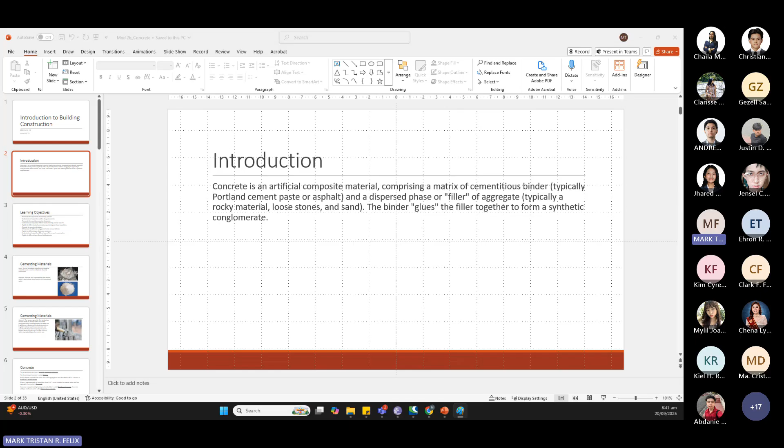Okay, then the other one is fine. Then whenever we say the term aggregate...

It is the material added to concrete that is normally quarried. So sand, you excavate that from the nearest source, which is normally a river, like here in the Philippines.

Here in the Philippines, like here in Luzon, not sure where the other island provinces get their fine aggregate.

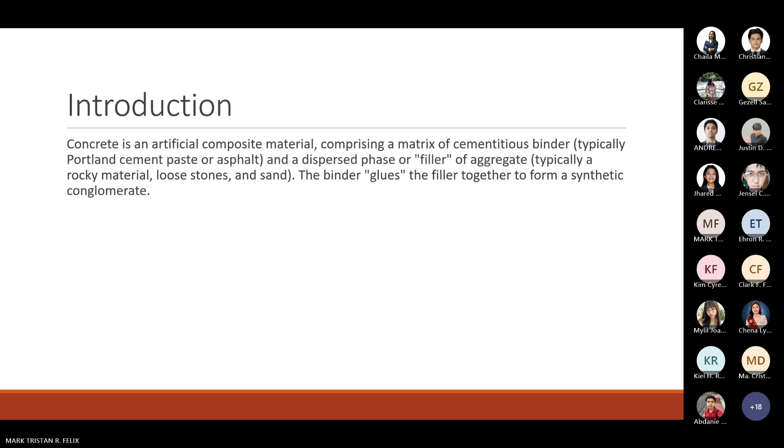Okay, so at the end of this lesson, these are our learning objectives. First, we enumerate the components of cementing material, understand and explain the qualities of a good concrete, followed by the composition

of concrete, and then understand the testing used for concrete, the ratio for concrete proportioning, concrete mix design, and curing period for the removal of forms,

different types of concrete admixture, different types of forms used in construction, and lastly, metal reinforcement.

So you might wonder why there's metal reinforcement. It's because when we just make concrete alone, that's only the composition of the four materials I mentioned.

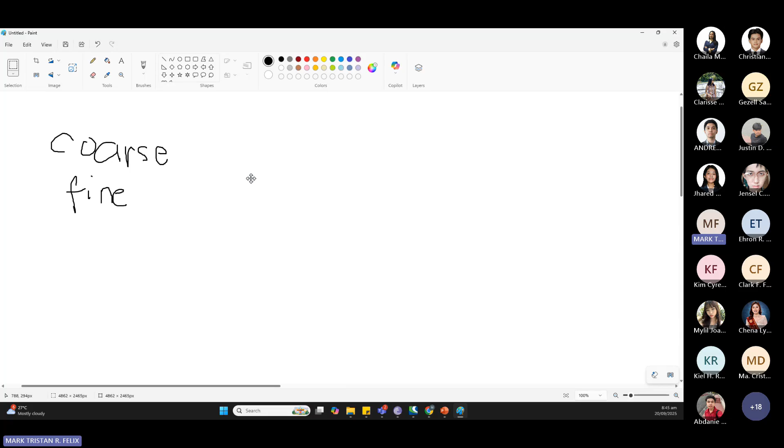Although this topic will be discussed further. For example, let's say we have a beam. Okay, a beam, wait...

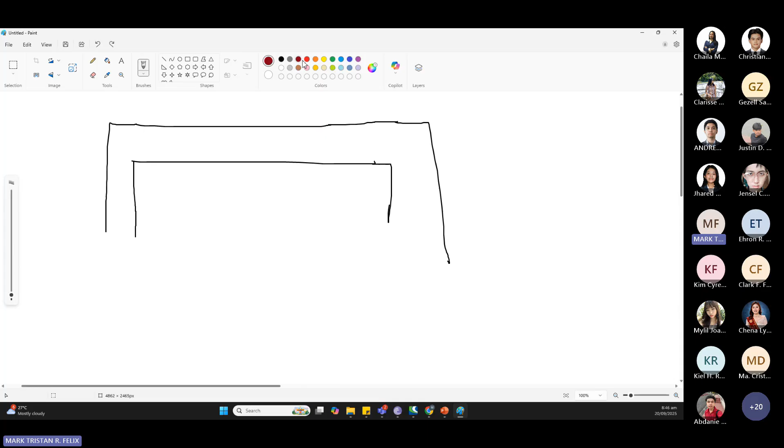So for example, we have a beam, let's say supported by both ends. Now, our deflection, right? Normally when we apply a load on top, it goes like this.

Okay, so now imagine the molecular composition of concrete, or its surfaces and what's inside.

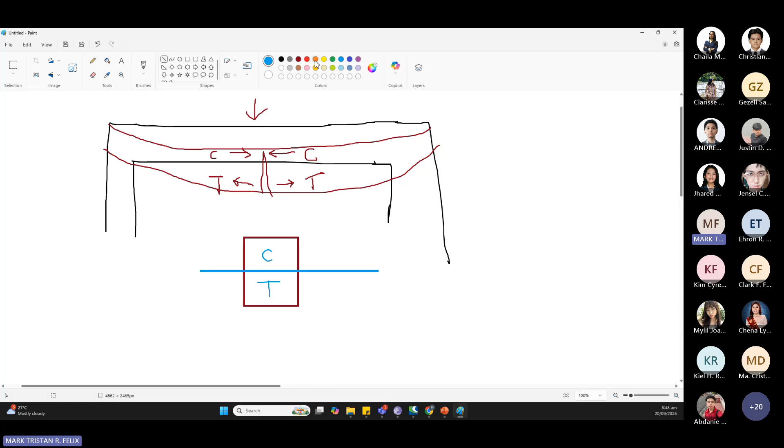So kapag wala tayong bakal, ang mangyayari sa concrete, itayo natin upright. Once na nag-apply ka ng load, pag walang bakal, mabibitak yan. Ang failure niya kung nasaan yung load. So we don't want that to happen. Kaya para mitigate ang failure kapag concrete, naglalagay tayo ng rebar sa loob.

Now with that rebar, so i-draw natin dito. So with that rebar, actually ang dinedesign usually sa ilalim, kung nasaan yung tension. Eto pa yung sa taas, naglalagay lang tayo para yung sa very basic para pantay sila, tsaka may paglalagay ng stirrups. Pero may meron pa ring calculations that would require. Pero in simple cases na tension lang ang kailangan mo, yung sa ilalim lang ang meron, tapos ito yung sa ibabaw, yung paglalagyan lang ng stirrups.

Pero anyway, through this tension, ang rebar na ina-apply natin, i-withstand niya yung tension. On the other hand naman, since it is a concrete material, yung compression, walang problema. So both of the materials work together to counter the forces of compression and tension. So ganito yung bending ng beam kapag ka-supported sa both ends, and then ito yung location ng compression and tension.

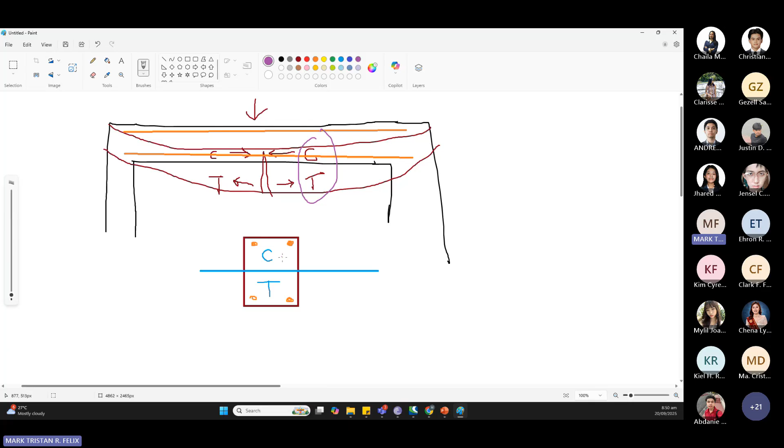On the other hand naman, if the beam is sabihin natin cantilever, medyo ibang usapan yan kasi once na nag-apply ka ng load dito, sabihin natin the support is nandito sa side na ito. When you apply a load, okay? Ang ano niyan, pababa, 'di ba? Parang yung sa springboard ng mga swimming pool sa Olympics, ganyan, 'di ba?

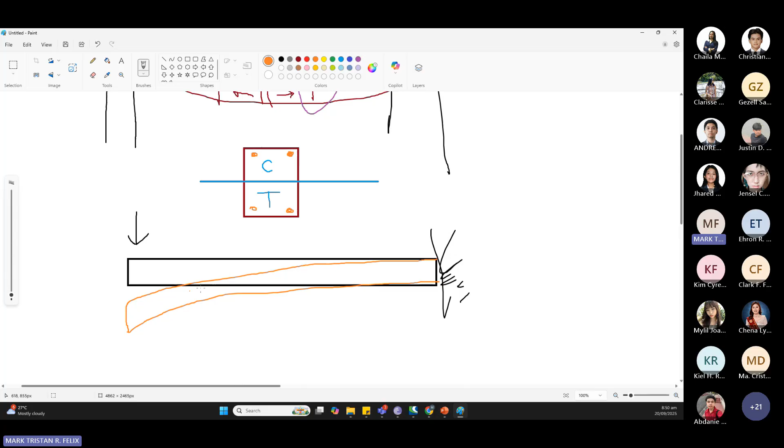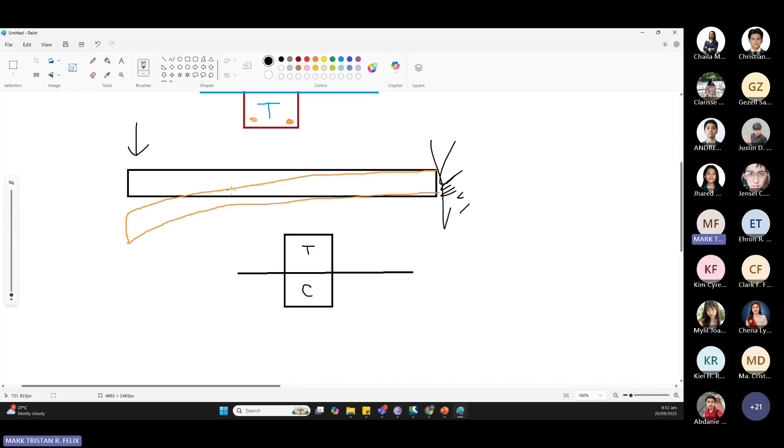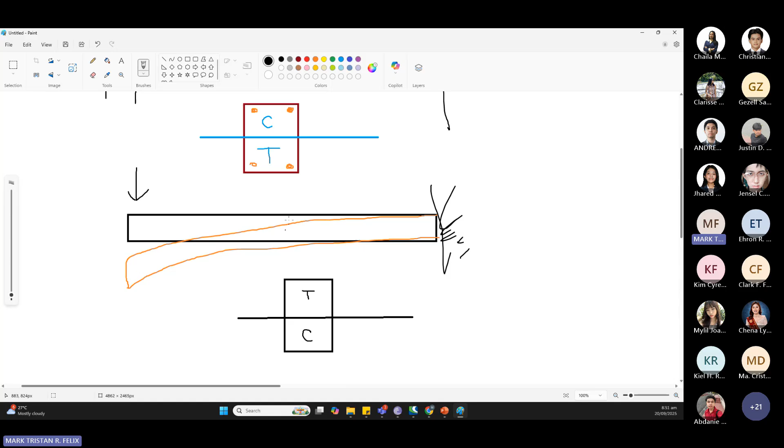So since ang deflection niya ay ganyan, o yung pagka nag-bend siya, ang case natin is ang curvature niya parang pataas, 'di ba? So sa mga cantilever beams, ang location ng tension at compression ay magkabaliktad naman. Nandito yung tension, then nandito yung compression. Kasi yung ibabaw naman yung medyo na-stretch, 'di ba? Compared doon sa ilalim. So ganito yung magiging behavior, and then ito yung location ng compression and tension, which will also be discussed sa inyo further kapag nandun na kayo sa subject na RCD.

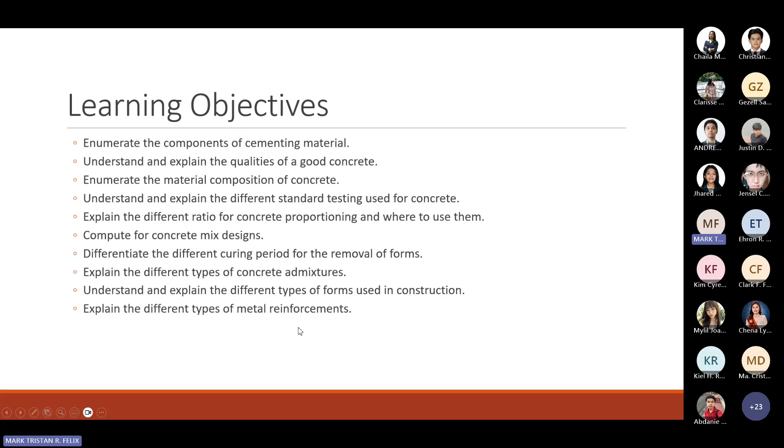Mas detailed yung discussion dito. Okay, so let's continue. Kaya ko siya in-explain muna for you to understand the purpose of having metal reinforcement or steel reinforcement sa concrete, at saka kaya siya tinatawag na concrete lang versus ang reinforced concrete. Pero i-discuss ko siya later on in more detail.

Ayan, so cementing materials. Ito yung mga cementing materials that can be used, yung binding o yung parang glue material o yung nagbabind. So first is lime. It is one of the oldest manufactured building materials, used in mortar and plastering by early civilization. Kahit panahon pa siguro ng mga Egyptians, ng mga Romans, etc., ito din ginagamit nila. Then next is gypsum.

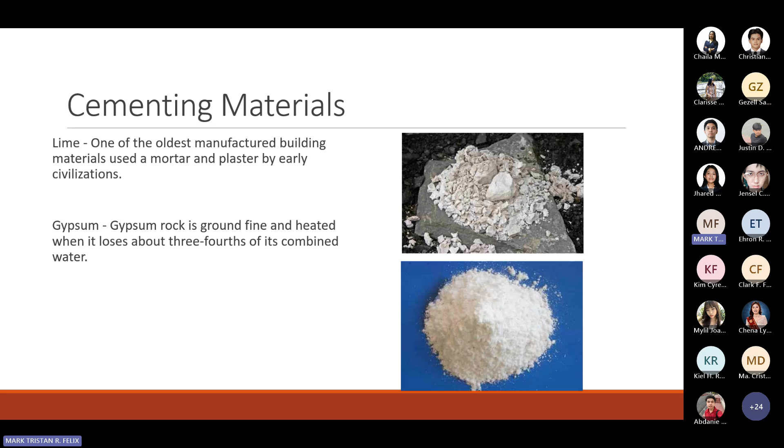Gypsum is a rock, ground fine, heated when it loses about 3/4 of its combined water. So same din, it is a cementing material. Ayan, so nung panahon pala ng mga Roman, doon nila na-invento yung cement. So from these two, they evolved with this one. The Romans were the first to develop cement by mixing slaked lime with pozzolana, which hardened under the water. Meaning pag pinag-combine sila, tumitigas siya kapag may tubig.

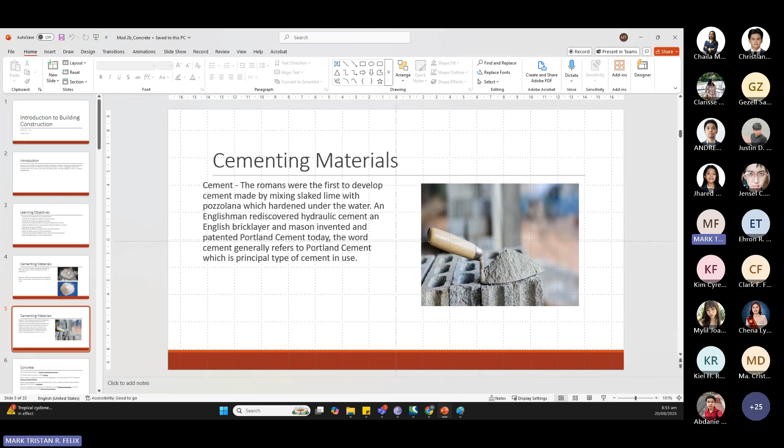An Englishman rediscovered hydraulic cement, an English bricklayer and mason invented and patented Portland cement today. So sila yung nag-patent ng Portland cement. Then the word cement generally refers to Portland cement, which is the principal type of cement. So class, take note na maraming types of cement, pero ang pinakasikat o pinakakilala o pinaka-commonly ginagamit is Portland cement. So actually madaming klaseng cement. Let's do our quick research sa Google, tingnan natin.

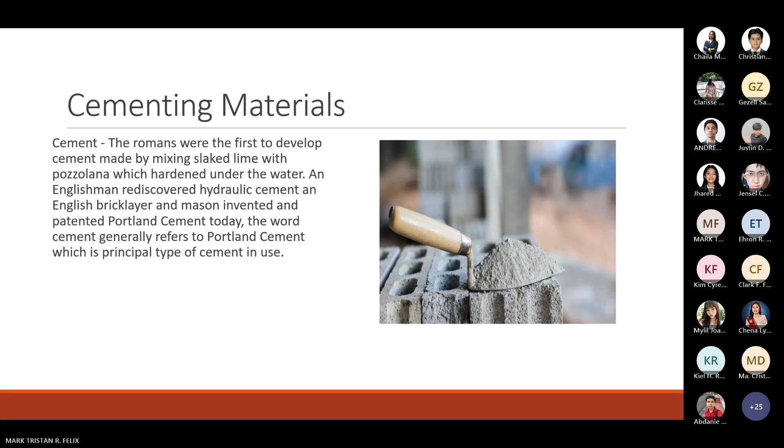So next, concrete. As I've said a while ago, it is a combination of cement, aggregate, and water. For the aggregate, that's the combination of coarse and fine aggregate, or sand and gravel. So ang tawag natin kapag tumitigas yung concrete is setting. You may find it confusing kapag sinabi natin setting ng concrete tsaka yung curing. Pag curing kasi, we make sure that the desired strength as it sets is achieved, kung paano natin pinapatigas yung concrete. So again, almost identical, similar yung setting and curing, pero iba yung definition ng curing versus setting.

When cement is mixed with water and fine aggregate, or less than 1/4 inch, so it is known as mortar or cement plaster. If we are only mixing sand, walang gravel, ang tawag natin doon is mortar or cement plaster. Normally the application of that sa construction is kapag papalitada tayo, yung plastering ng pader, naglatag tayo ng hollow blocks as plaster. So kung gusto natin kinisin, buhangin lang yon, walang graba, kasi kapag may graba, kakapal yung palitada natin, tsaka baka hindi siya kuminis.

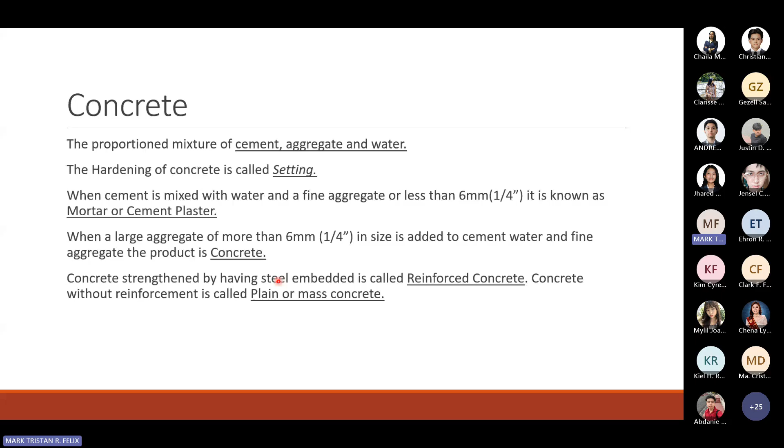So what's a good quality of concrete? Concrete should be strong, durable, of uniform quality, and thoroughly sound. So dapat matibay, matigas. Wait lang.

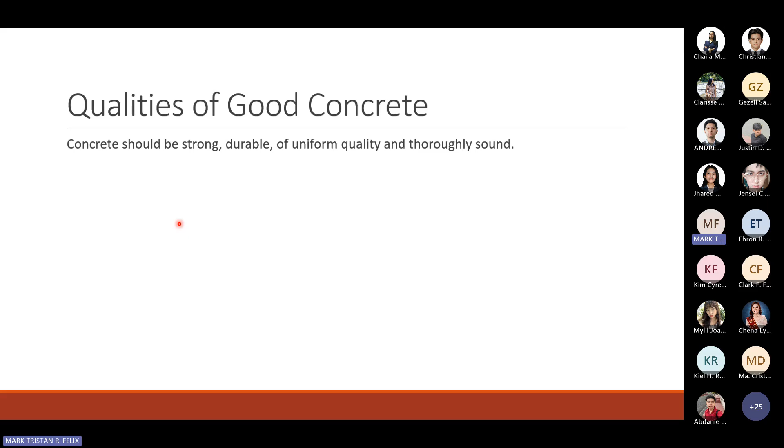Okay, so the good qualities obtained. Paano ba natin nakukuha itong good qualities of concrete? Paano natin na-ensure na matibay at sound at uniform yung quality? Meaning, all throughout the entire concrete member or structure, iisa lang yung quality. So we should be careful first in the selection of materials. Syempre, kung anong ginamit natin sa isang part, yun din yung gagamitin natin all throughout the entire project. Then, correct proportioning. Hindi pwedeng basta-basta halo lang tayo ng graba, ng sand, tsaka ng semento.

Sorry class for the intermission. Anyway, going back. So, aside from the correct proportioning na hindi tayo basta-basta buhos lang, lagay lang ng mga materials, we should also make sure that whenever we mix the material, we mix that thoroughly. So, there are at least 3 ways for us to mix concrete.

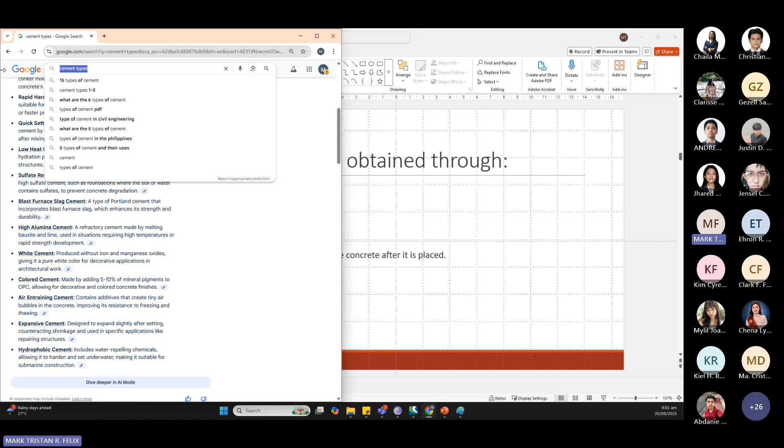Una, using a concrete mixer coming from a batching plant. Ano bang itsura ng batching plant, meron ba ako dito? Wala. So, pakita natin ang itsura ng batching plant. It can be done sa batching plant, or it can be mixed by a one bag mixer, or it can be done manually. Yung sa manually, yun ang kailangang i-thorough mix natin. Pakita natin, batching plant, para may idea kayo kung ano itsura.

Or class, kinakausap ako ng anak ko. Anyway, so going back.

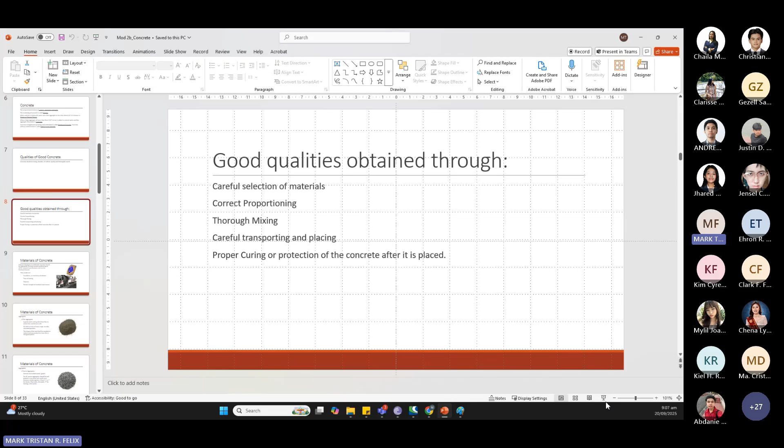Whenever you are using this naman, ang ginagawa dito pagkahalo, ibinubuhos na doon unti-unti, pwede mo siyang ibuhos doon sa mga timba para i-lift manually. That's also same with the manual mixing, yung hahaluin sa sahig. So as part of the transporting, tina-transfer and piniplace siya sa location of the structural member na concrete through pail.

Gumagamit tayo ng timba. Normally, meron tayong nakikita mga timbang malalaki sa site, hindi yun pinupuno kasi mabigat ang concrete. Kahit maliit na timba, pag napuno, sobrang bigat na, kaya wag pupunuin yung malaking timba tapos ipapabuhat sa labor natin. Alam naman yun ng labor natin kung hanggang saan ang carrying capacity nila, pwede naman silang magpabalik-balik ng pagbuhat ng timba na may concrete.

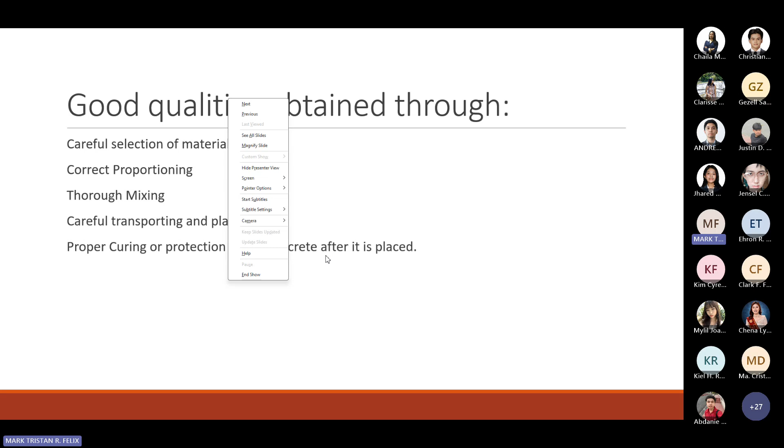Lastly, proper curing or protection of concrete after is placed. Yung curing, eto na yung time habang nagsiset siya, we achieve the compressive strength na kailangan niyang ma-achieve. In terms of protection, kapag let's say inabutan ka ng ulan, takpan para hindi ma-penetrate ng ulan yung tubig, etc.

Kunwari nag-hardens na, later I will discuss kailan pwede tanggalin yung forma, binubusan ng tubig. That's part of the curing process. Kasi pag hindi, dahil may external weather factors, the amount of water applied sa concrete, pwede siyang matuyo. Wala namang problema kahit madalas basain yung structural member, actually mas nagpapatibay pa nga sa concrete yun. Wag lang magdadagdag ng tubig habang basa pa yung concrete, ginagawa to kapag tuyo na.

Then that's also the reason why whenever we created a concrete cylinder, inilulubog natin sa tubig kapag natanggal na sa forma, kasi it helps the concrete as it settles or as it hardens. So yung curing niya, para ma-reach niya yung desired strength niya. We submerge that sa curing tank o sa tubig, and in a way, yung actual na binuhusan natin para ma-cure, bubuhusan pa natin siya ng tubig.

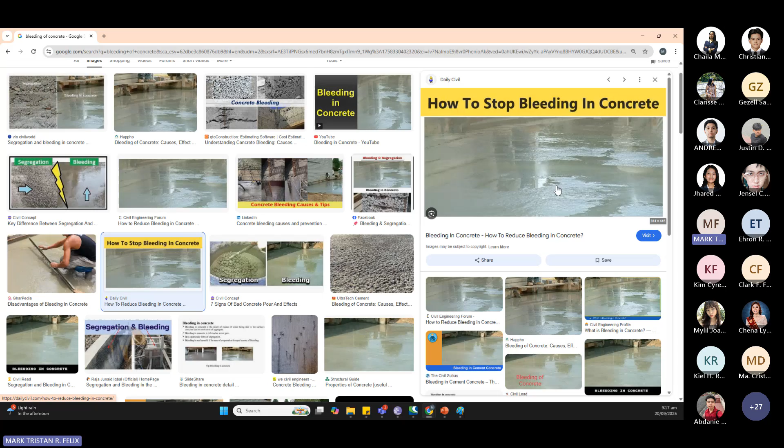Next is water cement ratio. The amount of water used per bag of cement usually varies from 5 to 7 gallons, with 6.5 gallons average for ordinary job condition.

Ideal mix is one that is plastic and workable. It should be workable, plastic in a way, matigas. Then, when using pumps, it should be fluid enough for us to transport through concrete pumps. It should not be too dry, because it would be hard for us to work on it. That's the term we use, workable. So if the workability is poor, it's hard to use.

And then, not too wet, because the ingredients would separate.

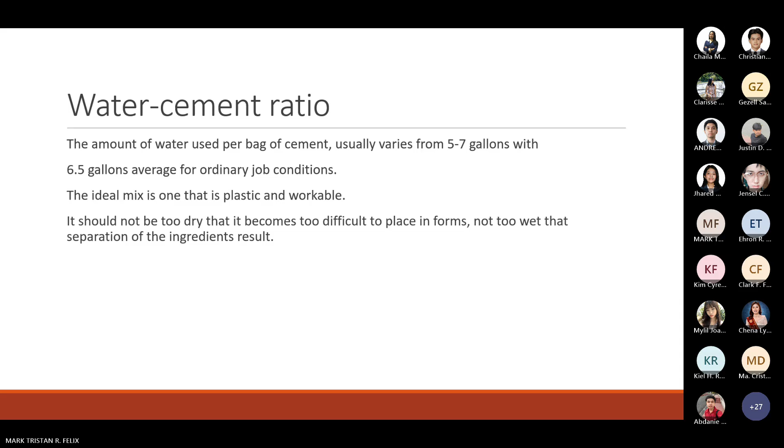And for us to determine if we have workable concrete, this is the test we do. You will do this in the subject I mentioned, construction materials, not sure what it's called now, but that's the subject where you'll make a cylinder. Before you create a cylinder, this is one of the first tests to ensure that the concrete you will form later on will be workable.

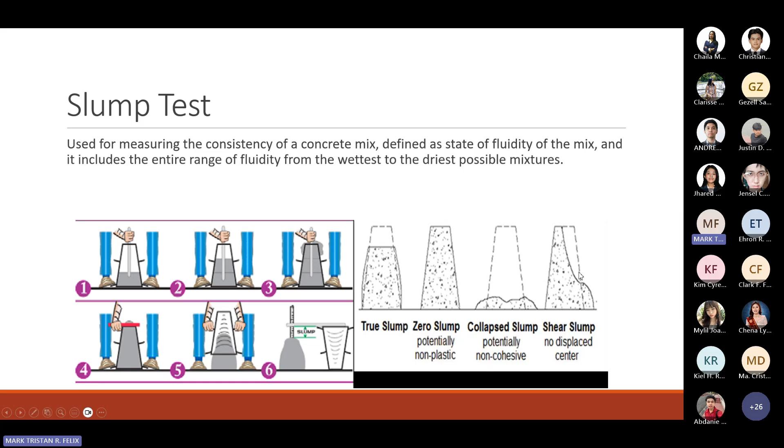For the proportioning of concrete, we have what we call classes. Later on in our class I will prepare an ACI method, because that should be discussed with you. Aside from this, the proportioning of concrete is about how we proportion concrete based on the strength we design. Now this one, I'm not sure if it's under the syllabus, but I'll include it since it's still proportioning of concrete - it's not just based on ratio.

What I'm showing you here is based on the ratio. What I'll discuss later is computed. So for the proportioning of concrete, we have classes and this is the ratio. The first number stands for the number of cement, the second is the number of sand, then the number of gravel. So how do we do it?

For the ratio, 1 bag of cement, and then the next one is the equivalent in bags of sand and gravel. But the proper way is to make a mold for calibration - you create a 1 by 1 by 1 cubic foot mold.

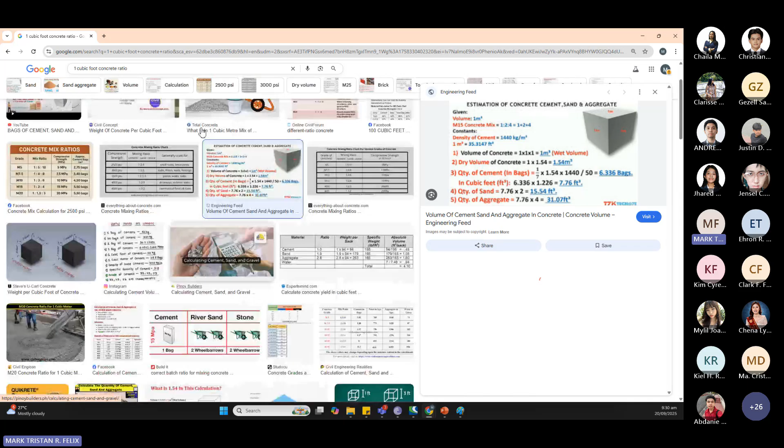entity, 'di ba? Galing yan sa puno. So nag-a-absorb kasi yan ng tubig. Yung mga kahoy. Now, kapag yung normal plywood ang gagamitin natin, tapos we apply oil, so somewhat nagkakaroon ng parang separation yung concrete ng konti doon sa plywood. Kaya lang mag-absorb pa din siya ng tubig.

Ngayon, para mas maayos yung natin, paggamit ng formworks, ito yung ginagamit, phenolic. Pero hindi naman restricted gumamit ng plywood. Kailangan lang talaga yun, maglagay lang ng oil at least para hindi mahirap tanggalin. So now, if you're gonna use phenolic, since may coating siya, kailangan mo pa ding maglagay kasi ng used oil.

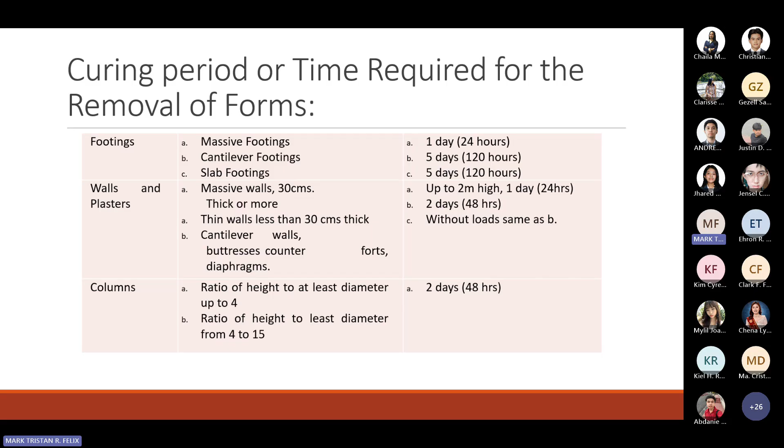Dito. Pero for those slab or beams, kapag tinanggal na yung formworks, tinutukuran natin sa ilalim. Yun yung makikita nyo sa construction site. Yung mga may bakal na nakatukod or sa mga bahay na pinapagawa, may mga kahoy or coco lumber na nakatukod sa ilalim. Ang tawag naman doon, shoring.

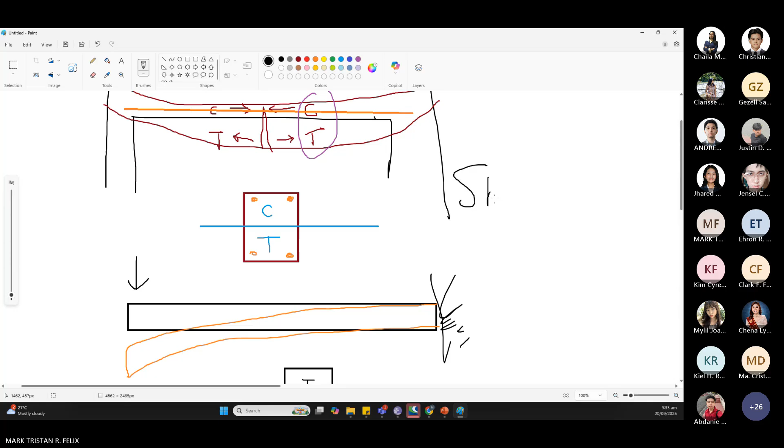So, ang tawag doon, shoring. So, kung ito yung slab natin, meron tayong mga tukod sa ilalim. Para habang tumitigas siya in 28 days, so may tukod tayo.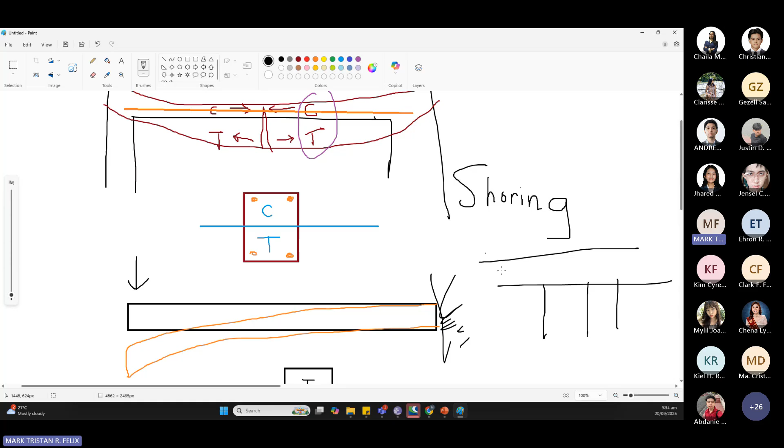Then class, pag tinanggal mo yung formworks, hindi ka pa pwedeng mag-continue ng work sa taas ha. I think a certain time frame pa, kahit hindi pa 28 days, dahil may shore naman. Pero wag ka muna mag-work dun kasi medyo malambot pa yung loob niyan. Kahit may shoring, baka kasi maglagay ng mabigat, hindi kayanin ng shoring. Masira lang yung ginawa. Ito, pakita din natin.

Ayan, may shoring na nilalagay sa walls. Ayan, eto, shoring. Ayan yung mga makikita niya nakatukod. Pwede rin naman gawa sa kahoy yan, pero normally, ang ginagawa na ngayon, bakal eh.

Tsaka para reusable. Eto, pwedeng, kunwari mangongontrata kayo balang araw, magandang maging investment tong mga shoring na to kasi pagka kinote mo siya sa isang project mo ngayon, sa mga susunod, pwede pa rin siyang i-code. So, hindi mo na siya itatapon kasi nare-reuse.

Now, kunwari, merong masirang part, yung mga clamp. Eto, yan yung pula, yung mga clamp niya, ganyan. So, nare-replace din naman yan. Pag manual lang shoring, yung iba ganito. Pero ito medyo iba pa eh. Pero yan, ang lagyan natin siya, wood.

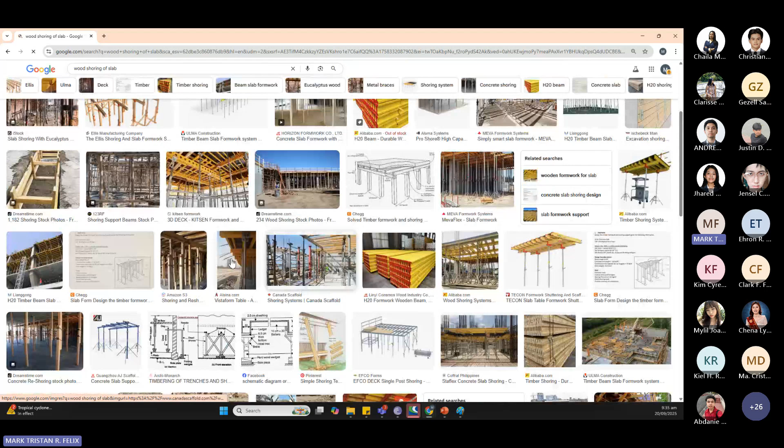May kahoy ba dito? Wala na halos. So baka sa Pilipinas na lang yon yung gumagamit nun. Pero anyway, so yon, ito yung mga ginagamit once na we remove the formwork. So pangtukod sa ilalim.

Then take note that concrete also shrinks. So meaning lumiliit siya or nag-expand due to the temperature. So with that, naglalagay tayo ng mga admixture. Kanina nabanggit ko yung admixture. So meron tayong mga admixture para maiwasan natin yung shrinkage or yung pag-expand ng concrete.

Take note, nangyayari yung shrinkage sa malalamig na temperature. Nag-expand naman siya sa may init na temperature. So, ang gusto nating mangyari sa concrete is that it settles normally. Kapag malamig ang panahon, ang tagal ng settling niya, or minsan nag-shrink pa siya. So, naglalagay tayo ng admixture.

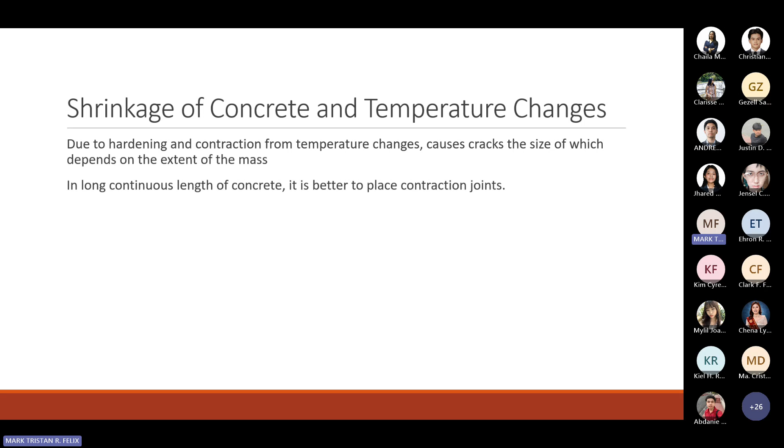Okay? So, ano ba yung admixture? It is a substance na inilalagay sa concrete. So, nagiging somewhat panlimang ingredients kasi kina-counter niya kung ano yung weather, yung environment condition. Ang admixture, iba't iba ang purpose niya depende sa pangangailangan mo. Iba't iba din ang tawag sa ilalagay mo. Pero in general, admixture yung panlimang ingredient.

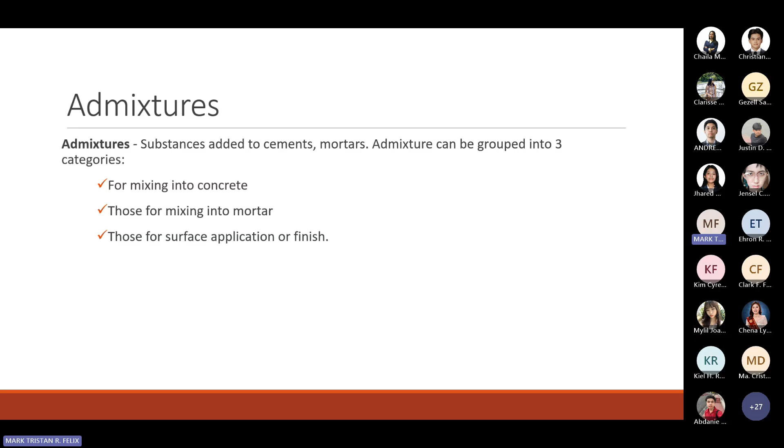So, it is used for mixing into concrete, or mortar, or for surface application. So ano-ano yung iba't ibang admixture to counter yung shrinkage, yung expansion, yung pag-settle or yung pag-cure ng concrete na mabilis dahil mainit, natutuyo yung tubig, or yung pag-settle ng concrete ng matagal kasi masyadong malamig.

So ito, ang tawag natin doon is accelerator kapag gusto mong matuyo agad. So speed up setting time and develop earlier strength to reduce the length of time for protection. So normally, we add this sa mga malalamig na lugar or yung medyo humid. Retarders naman, kapag very hot yung condition, we add this to slow down the hydration.

So, that is the retarder. Another use of retarder is in places like deserts in the Middle East, where they normally use it.

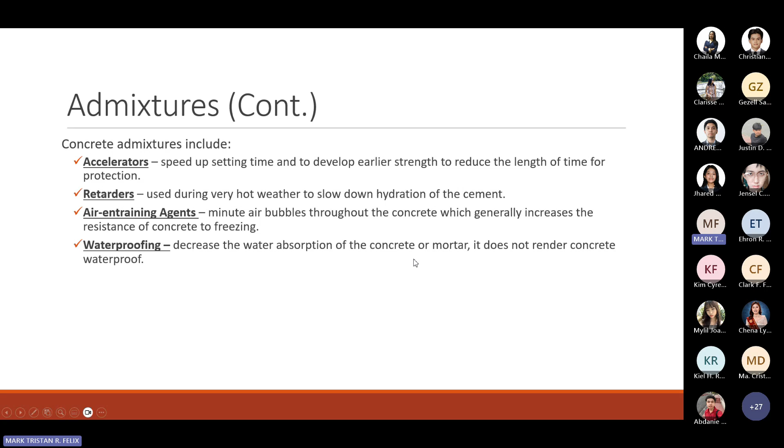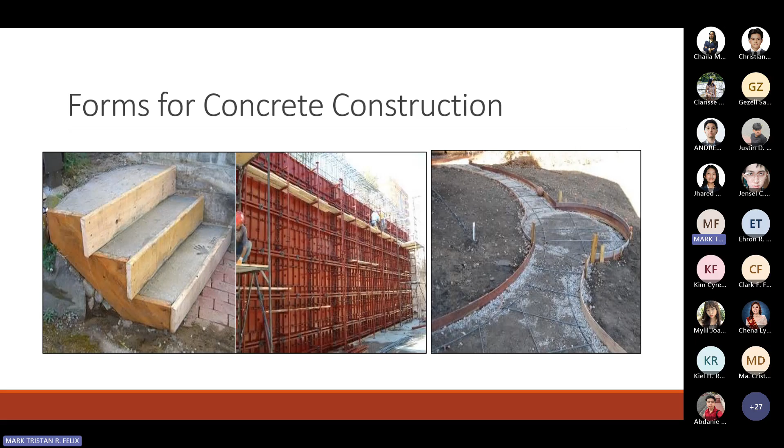Let's skip that. Here are the forms of concrete construction. We can use plain wood formworks, or others use hybrids like steel formworks, or a combination usually of phenolic board and steel, or sometimes instead of phenolic board, a steel plate is used. Construction sites use this when the placement is repetitive, and it's more advantageous for the contractor to use expensive formworks since they can be reused for other projects. As long as the formworks can mold the specific member size of the structure being poured.

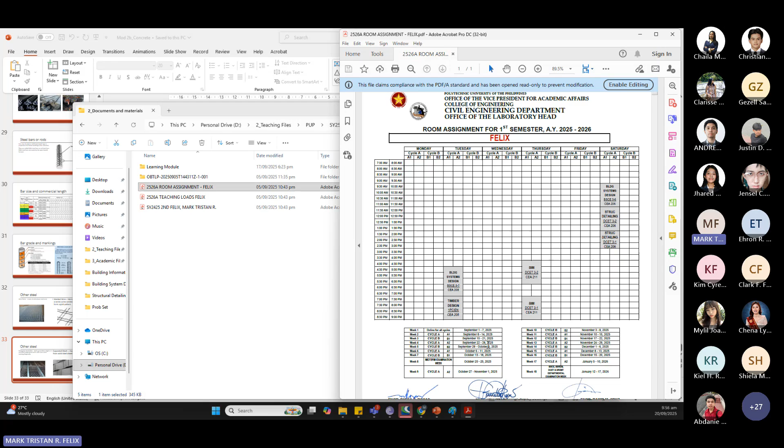Sige, mag-quiz na tayo para baka isa na tayo ng quiz throughout the semester. Now, tawag dito, so this one, ang topic natin will be yung module 1.

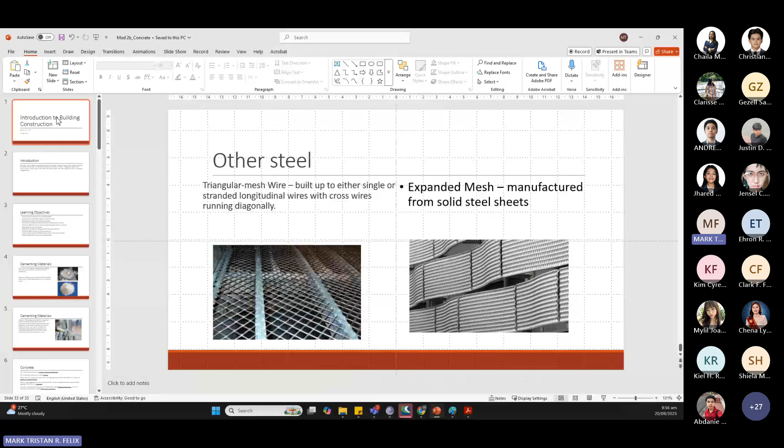Ito 2B kasama to, tsaka yung module, may changes akong ginawa. Module 2A, I think that's the earthworks. Check ko lang kung ano yung laman ng isa.

Theory, taas pala. Introduction. Check ko lang to kung anong uli yung content nito.

Pero itong earth and concrete, i-discuss na natin, isasama na natin yan kasi na-discuss na yan. Ito wala naman kayo makukuha dito. Hindi nakasama tong isa kasi outline lang naman to kung ano yung expected.

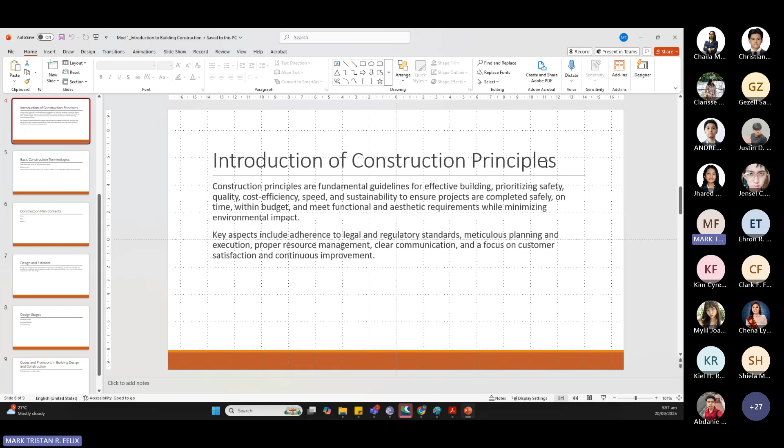Topic, ayan, so yun, ito yung ating exam. So whatever content is in here, so yan yung ating magiging ito pala, yan yung magiging coverage.

Now, just to be exact with the water, yung concrete ratio, i-exclude natin yung concrete ratio. Ito yung, ipalikan ko lang. Hindi kasali dito kung paano ginagamit ito.

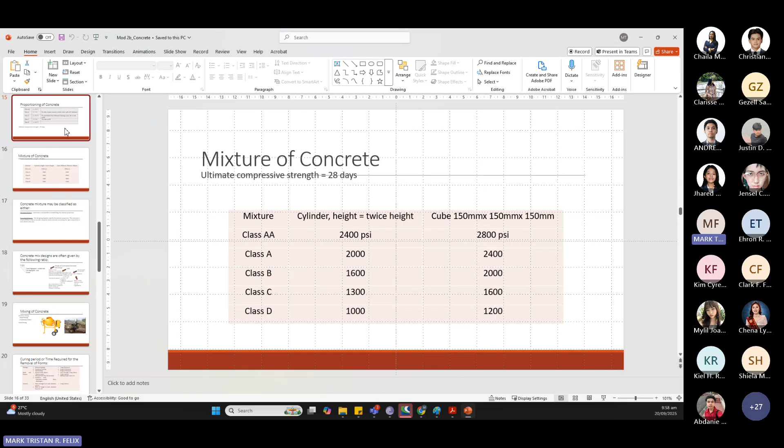Okay? Pero part pa rin to ng exam, meaning kapag nag-estimate na tayo, ilan yung kailangan nating bag of cement, paano natin ito ina-apply sa estimation. So meaning wala tayong estimation for now kasi ituturo ko pa lang siya sa mga succeeding meetings.

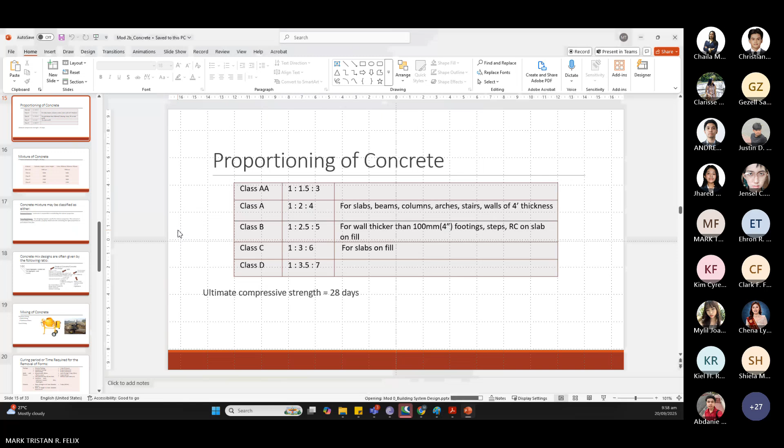So yun, then since we will be having our first quiz, tawag dito, I will create a separate recording for the estimate of concrete material sa ating structure, kasi assuming na lahat na kayo may plano next week.

So kaya make sure na makahanap kayo, kasi next week, hanggang next week pa naman, once na mag-commence tayo ng plate, I will be giving you a certain period of time for you to submit. Para less intindihin niyo kung saan kayo hahanap ng plano at magpo-focus na kayo sa plate. So ang plate natin is yun,

estimate ng concrete, ito yung 1. So the details will be discussed sa separate recording na gagawin ko, yun yung ating magiging coverage for plate number 1.